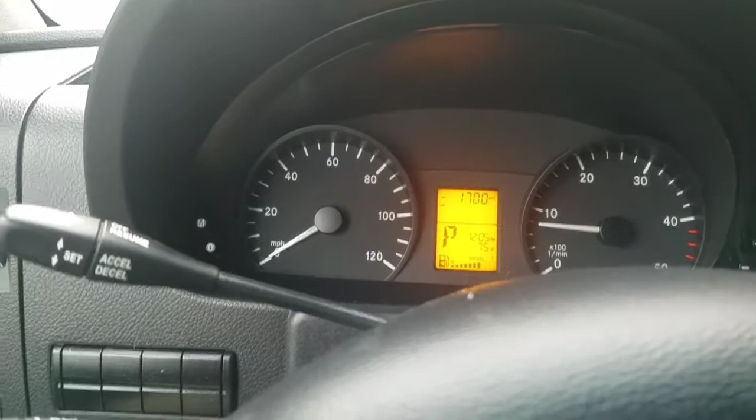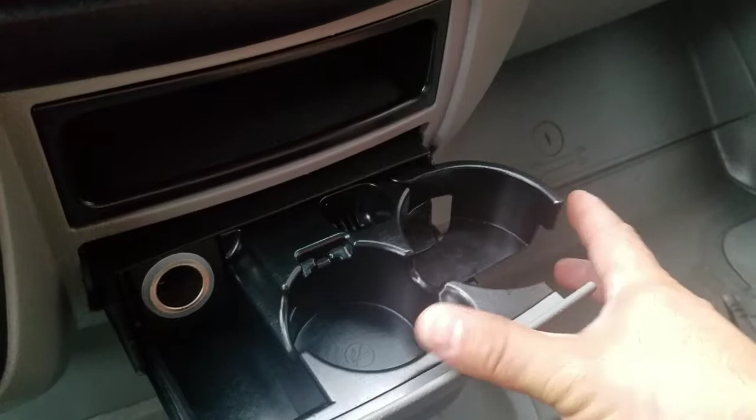Alright, there's a small cover missing for an extra button. It's just a cover, but it is missing. What else did we notice? There's a clip, the clipboard, supposed to hold papers. Put the clip here. That's broken. The cup holder is supposed to ratchet in and out to hold your cup. So if we decide to put our water here, it should tighten up and hold, but it doesn't. It'll just fall over. Alright, so I guess you could put it there.

Test the glove box. Glove box opens, closes, locks. Parking brake. Put in drive. Parking brake is holding. In reverse, holds.

Okay, we have another compartment here. Seems to be working. Dome light works. Both seat belts we tested, they're both functioning. They lock.

Interior looks pretty clean. Yeah, pretty normal wear and tear. It has 31,000 miles, very low miles. Alright, the interior does look pretty clean. Radio is functioning. Doesn't sound like any of the speakers are broken or damaged.

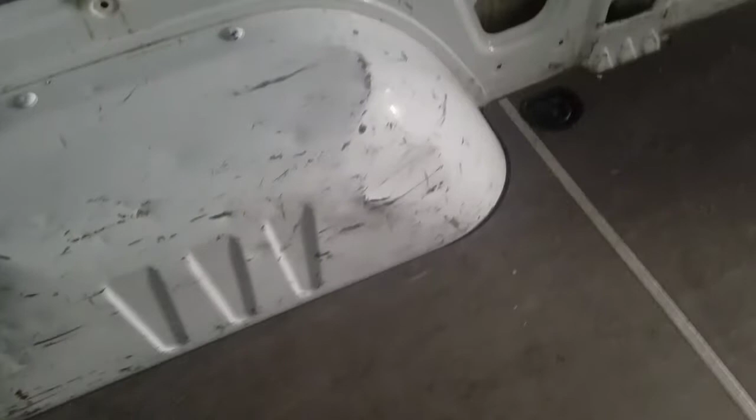We'll take a look in the back here. Floor looks pretty decent. The wheel wells are banged up a little bit on the left side. Some internal damage from it being used as a cargo van. Overall, it looks pretty good.

There's a few missing covers for the electrical system, but not a big deal. Everything else seems to be connected over here. Wiring's working fine there.

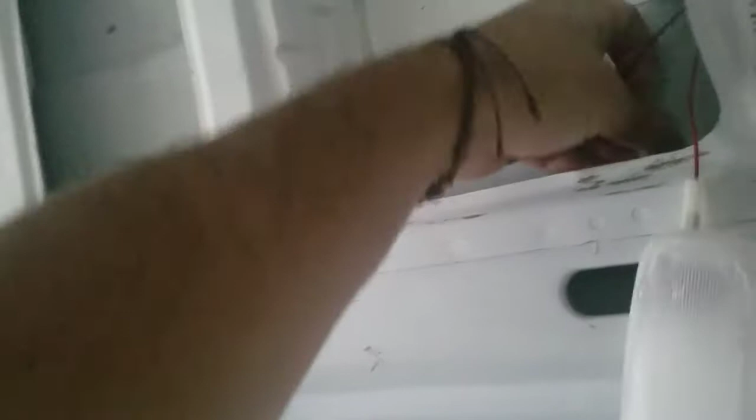Alright, I got a dome light that's— okay, so there's a little bit of an electrical problem here because I wiggle this and the light comes on and off. I guess the wire shorted somewhere. It came apart on the actual connection from the dome light itself. There's a little bit of damage on the panel, internal panel for the door. I'm not sure if any of the damage protrudes the body to the outside. I'd have to look from the outside when we get back out.

We're gonna go on a quick road test and see how everything feels. Okay, we tested the AC. It is blowing pretty cold. Fan speeds are working. Recirculate, it's working.

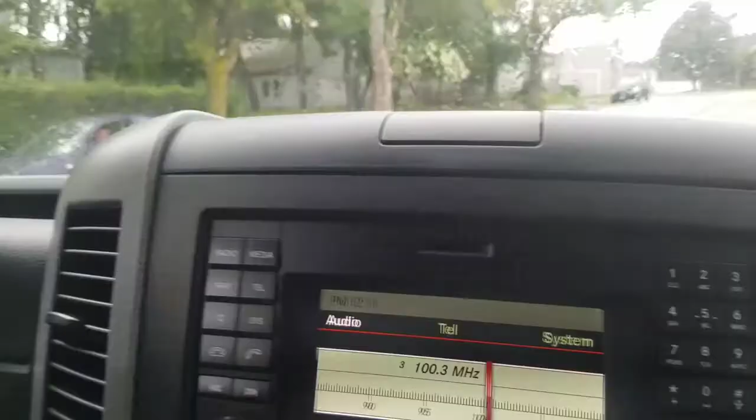Alright, so we're going on the road test. So far it feels pretty good. The wipers are wiping, no problem. There was a little bit of streaking in the beginning, but it seems okay now. The truck's a little bumpy, but it's probably because it's empty, and it has the 2500 suspension in it, so with an empty van you're going to feel a little bit more bouncy.

I hear the turbo coming on. It sounds like that's working fine. It has power. You hear a little bit of noise in the rear or in the back of the car, but it sounds like it might be normal. It's probably because the van's empty and it's echoing.

Alright, so we're taking it down the highway. It's raining pretty bad over here, but taking it down the highway. It has plenty of power. The vehicle accelerates when you ask it to. Engine feels very healthy. Tires seem to be grabbing the road pretty well. It's not slipping, even though it does have plenty of power to do so.

I'm going to take it on one quick ride just to get up to speed and make sure there's no vibrations, and then we'll head back to the shop and do the electrical inspection and the underbody inspection.

Okay, so we went over the bridge. We got it up to about 75. I didn't feel any vibrations. I think the truck only goes up to about 82 miles an hour, and then the governor will kick in. It won't let you go any faster anyways. So it feels solid. No lights came on the dash. Temperature control seems to be fine. And again, I didn't feel any vibrations.

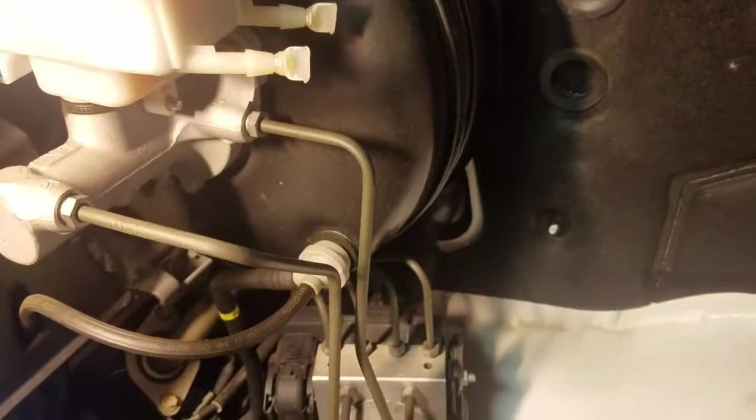So we have the hood open. It has a 4-cylinder in here. I do not see any signs of leaks. Washer tank is holding. Brake lines are okay.

There's no indication of a front end crash on the support, at least here. Looks like it's pretty solid.

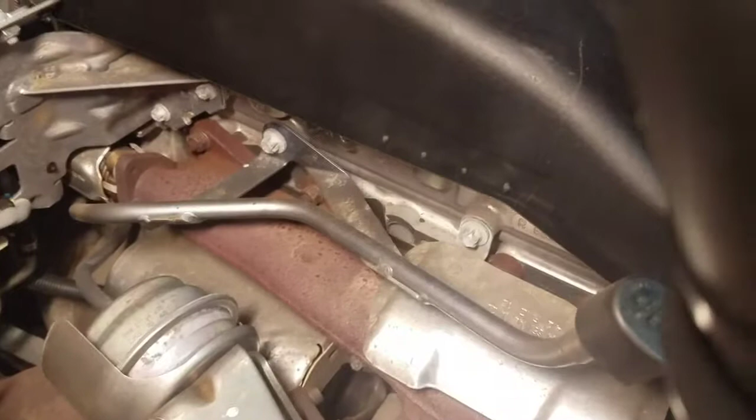Okay, this is the other side of the engine. The turbo looks okay. Everything looks very clean, which I would expect for a 30,000 mile car. Looks original, looks OEM. Diesel exhaust fluid.

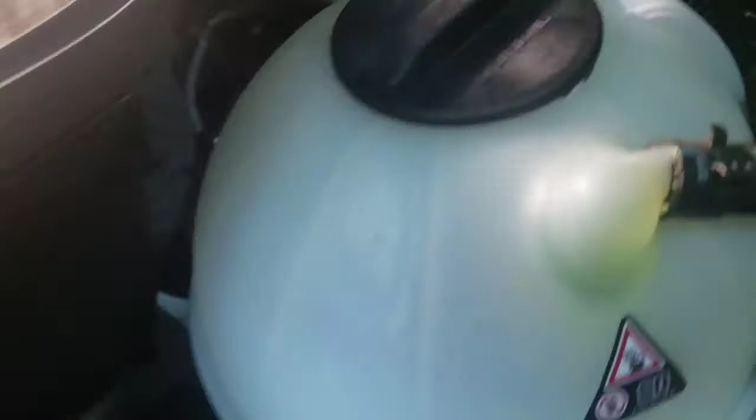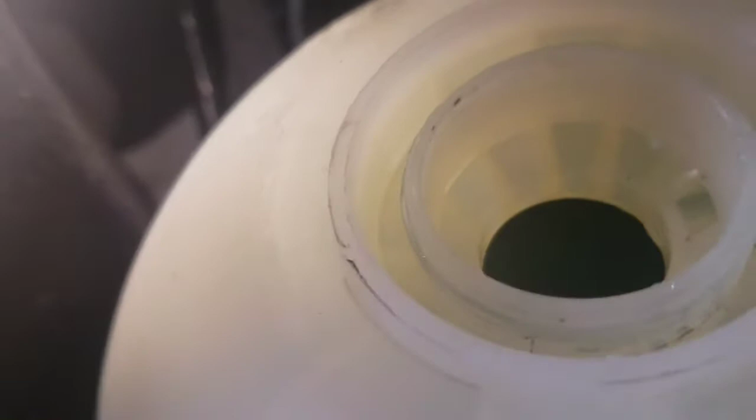The coolant kind of looks green, which usually means it's been replaced. Actually, no, when I look into it, it looks more blue, which is the OEM fluid, so that looks okay.

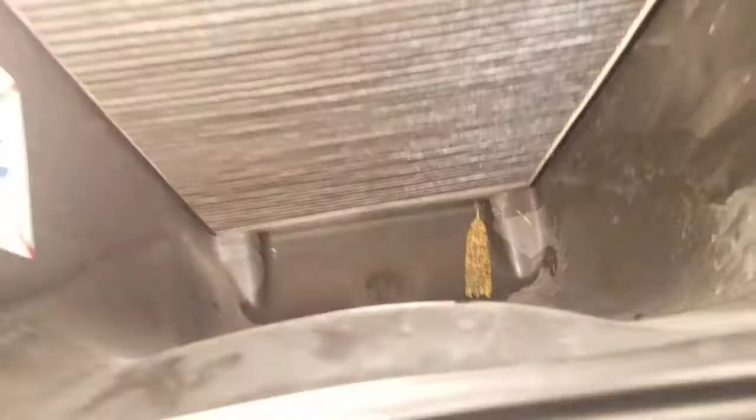I do notice that the reed valve, which is just a drain valve in the air filter housing, is clogged at the bottom. So what we'll do is try to clear the hole.

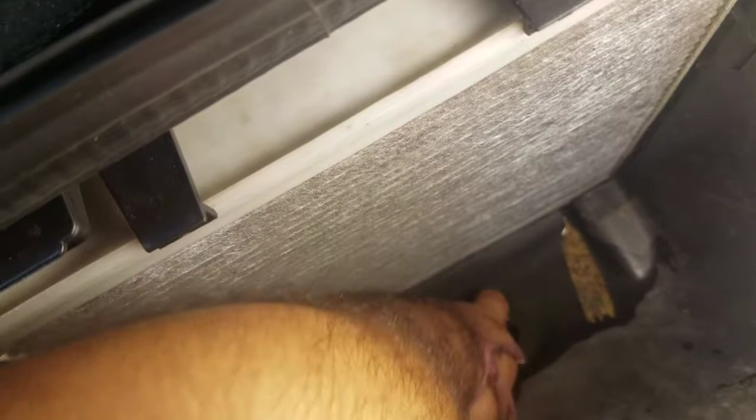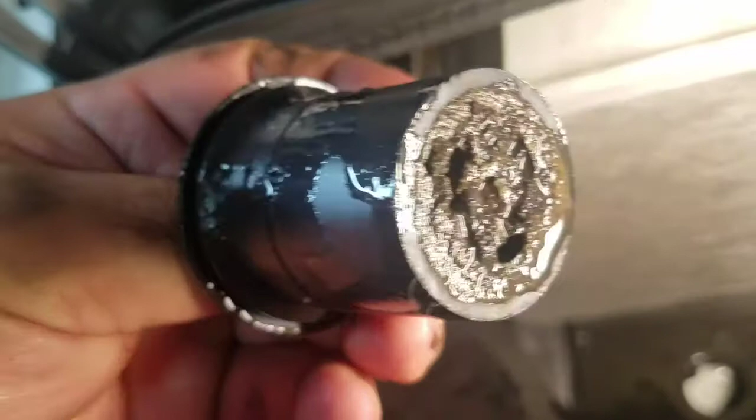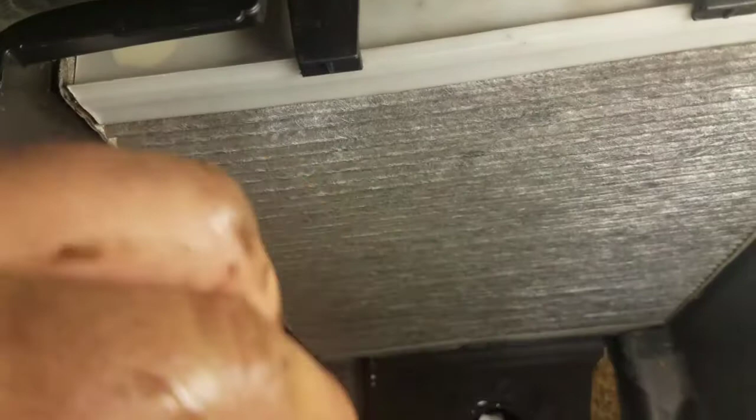It's better to just remove this completely. Alright, so I removed this valve. This valve gets clogged, cleared it out. We'll clean it really fast to prevent water from going in here later, because rainwater can come in, go through this filter. I don't know if it's happened already, and then it can go into the glove box area and into the car.

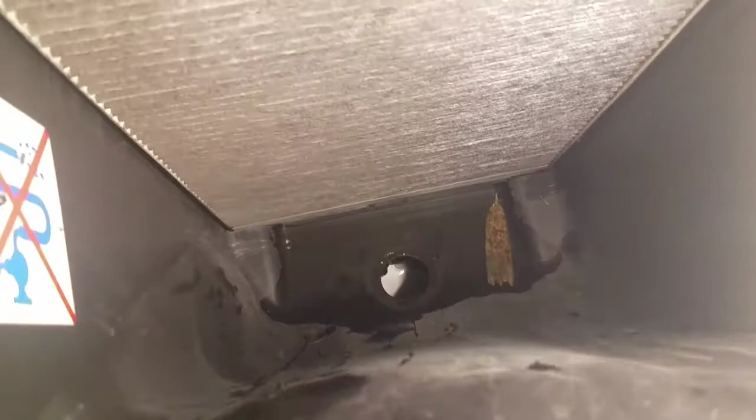So here, Jose, just grab this. We're going to clean that out in the sink. That's just a preventative measure, whether you buy the car or not, at least the next person won't have that problem.

Okay, the lights are all working. I do notice that there's some tape around the corner here of the light. I can't really make out whether it's cracked or not, but it does look like there might be a crack.

It's very hard to tell because they have the tape over it. Yeah, I can't really tell. The tape is definitely cracking, I think it might be covering something. I don't see why else they'd have tape over it, unless it was cracking or there was a crack to the lens. It's hard to tell without peeling that off, but the headlight may be cracked on that side.

Grille looks good, looks brand new. There's again some tape on this side. You might want to have them peel that off before you buy it and take some pictures to prove that it's not cracked on both sides. It might just be some tape someone put over there to protect it, but it's hard to tell whether it's cracked or not. The body looks like it's in really good shape.

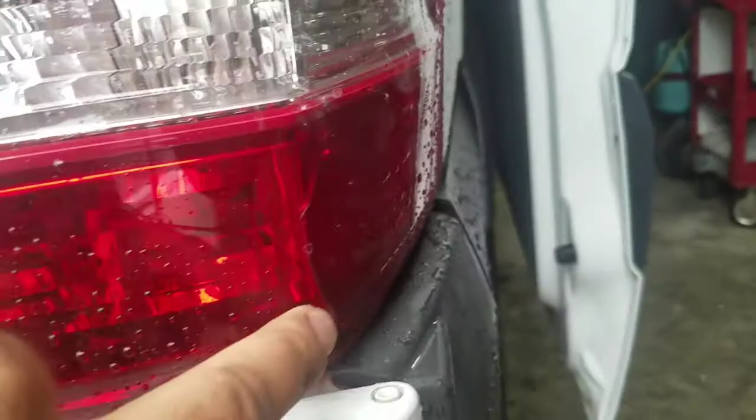Taillight has a crack right here, a small crack. Water's probably going to start entering. There's another crack down here, and one more - oh, that one's actually not going through, but you do have one at the bottom and one on the side. Water gets in here and it'll start corroding. It happened to our van.

This side, just a little scuff, but nothing cracked. On this side, doesn't feel like it - no, this side looks pretty good. Your marker lenses are okay, marker lens okay over here. It's hard to tell, but the third brake light looks alright as well.

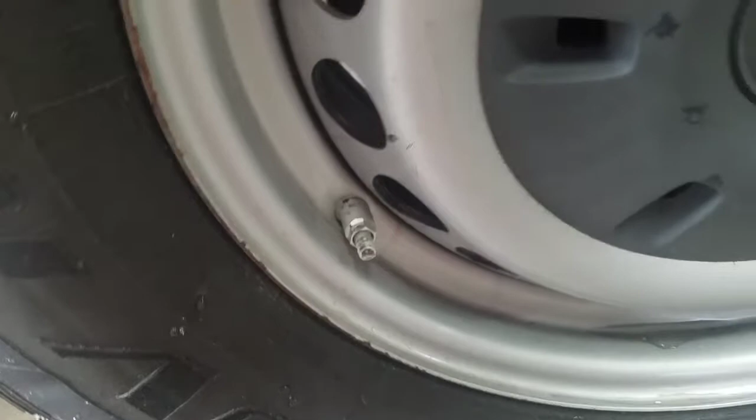Tires have ample tread. This is the left rear tire. Right rear tire is just the same. Right front tire, plenty of meat. Left rear tire, right rear tire the same. It has valve stems, metal, which probably means it has a tire pressure monitor system in it.

The sliding door opens very smooth, like glass. It's floating. We have some problems with our door on our van, so I noticed that that's in great shape there.

Doesn't really look like too many things were spilled on the interior, a couple of stains expected. We're running the diagnostic test now, which is why the wire is connected to it. And see, the door's opening - door opens, no problem. Interior looks pretty good. Everything looks good under there.

Let's see if it has the toolkit. Can you grab a flat screwdriver? We'll open up the toolkit. Window switches work, windows are going up and down. Alright, so the toolkit's in it - yeah, toolkit's in there, lug wrench, bottle jack, all your parts are there.

Overall, as I said before, the van's in really good shape. A couple of things like the tail lights, headlights are questionable. I'm going to check the brakes and the undercarriage while one of the other guys is connecting the computer and checking to see what kind of codes we have.

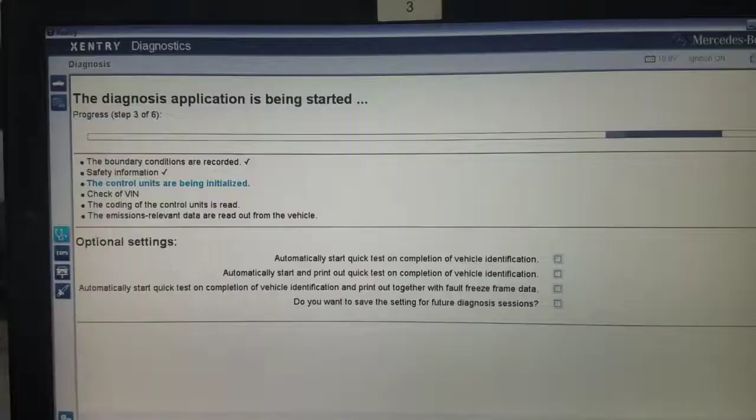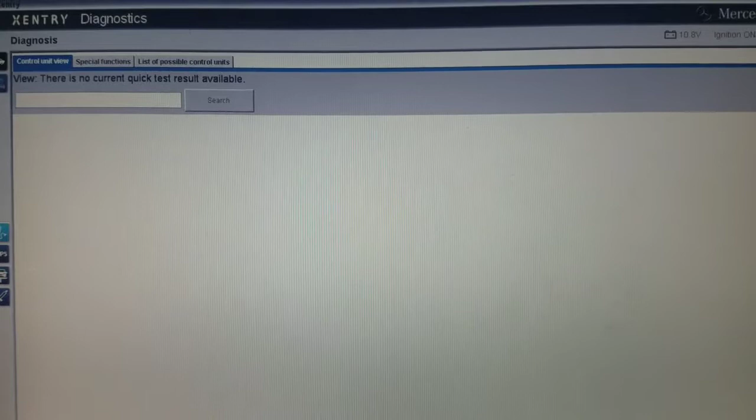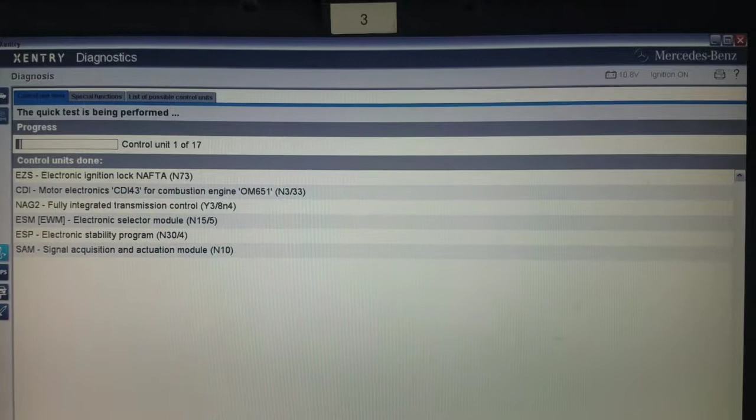Okay, now we're running the computer diagnostic portion of the test and the inspection, and the computer is going to do its thing. It's going to connect to all the control modules in the car and tell us if there's any old codes, new codes, current codes, and once we have all that data, we'll show you all the information. So we're going to do a quick test and run the tests: ignition lock system, engine module, transmission module - still running the test.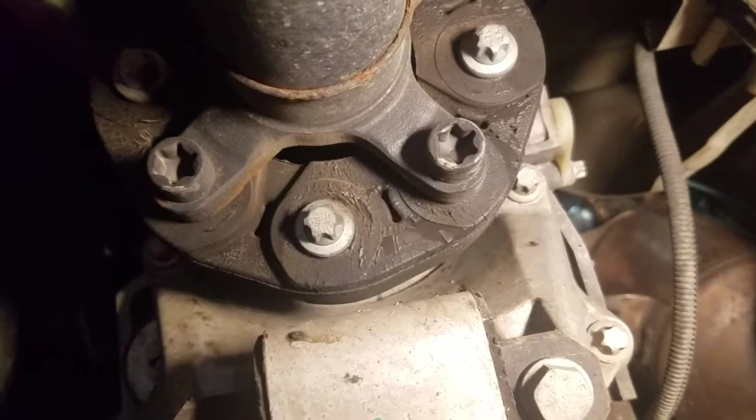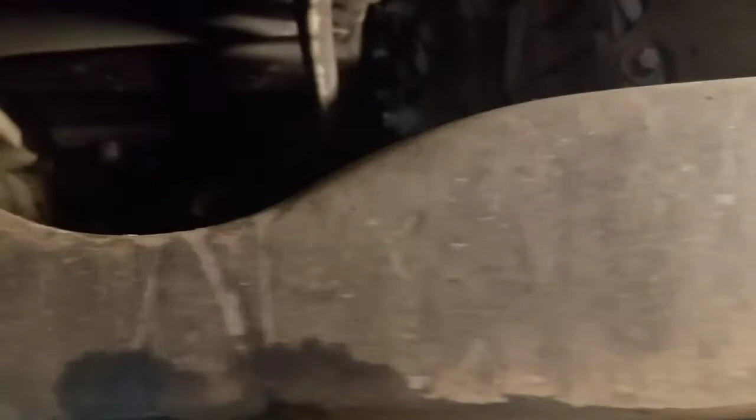I also looked at the front of the engine area, underpan, the underpanel for the oil pan. Everything is dry, I do not see any leaks or any signs of oil. Transmission looks good, again no leaks. Mount feels solid - well, not solid, it feels like it has the right necessary play. I thought there was a little bit of a fuel leak, smelled a little fuel when I slid under, but I think that's just some overspill going down the filler neck and dripping out the side. So it's a false alarm.

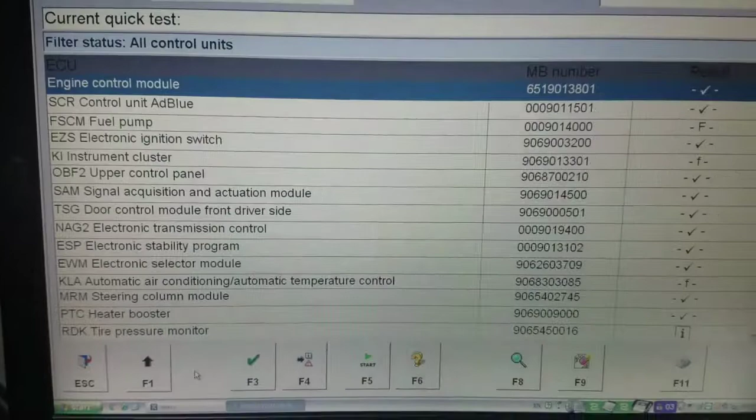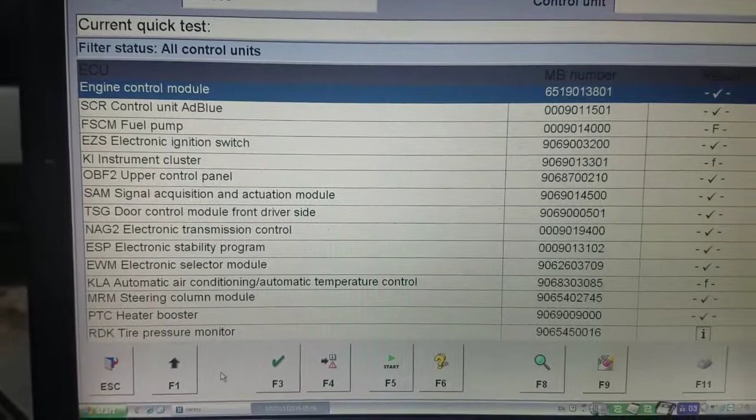Okay, for some strange reason I had an odd fault - it said unknown fault type in the engine control module. And whenever I click on the engine control module to enter it, it gives us a glitch and tells us there's an error, it cannot communicate. No matter what I do, it tells me to check these things. So it is possible it could be an engine control unit, a power supply, or engine CAN bus problem - CAN bus is usually the network communication data lines.

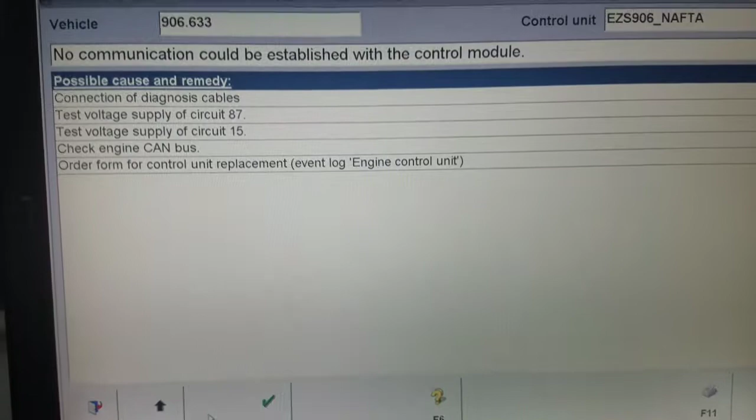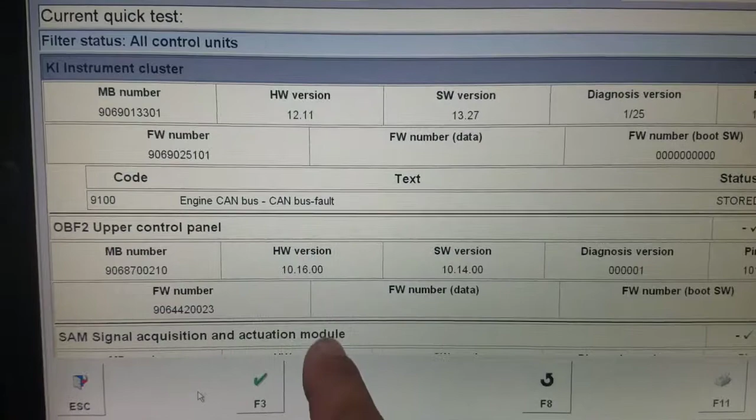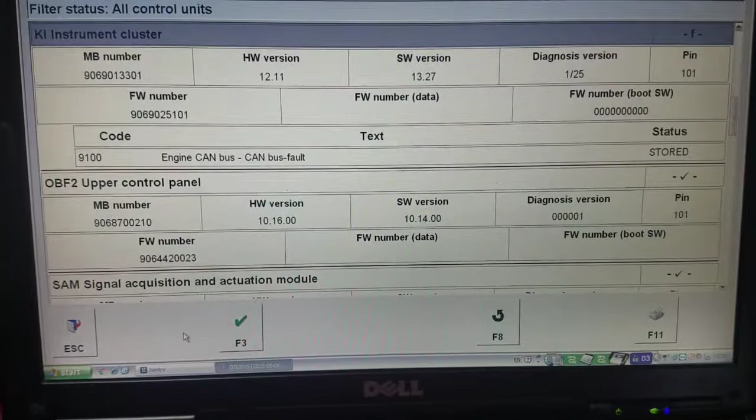That's possible because we did see another code in the instrument cluster - if we go here, it says the engine CAN bus has a CAN bus fault. So it's possible there could be a CAN problem with the car. It is driving fine, there isn't a check engine light, there isn't any issues with that. There may be nothing, but I have to at least disclose that I'm having an issue getting into the module. It could also be a glitch in our software, but unfortunately there's no other way to check that.

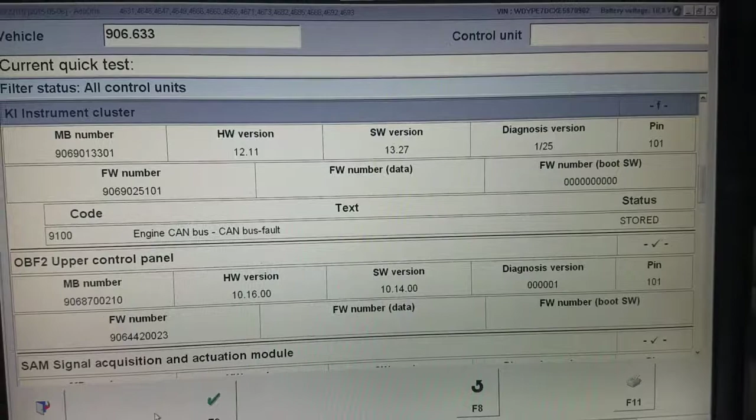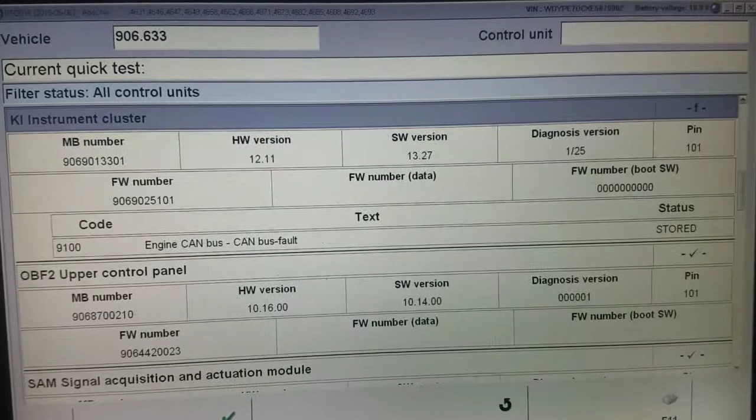If you decide to purchase it, I would definitely put a clause in there telling them that you might have to go to the dealer to have them check just to see if the engine module is okay with another software version, something newer. If it doesn't come up as a problem, then you're good.

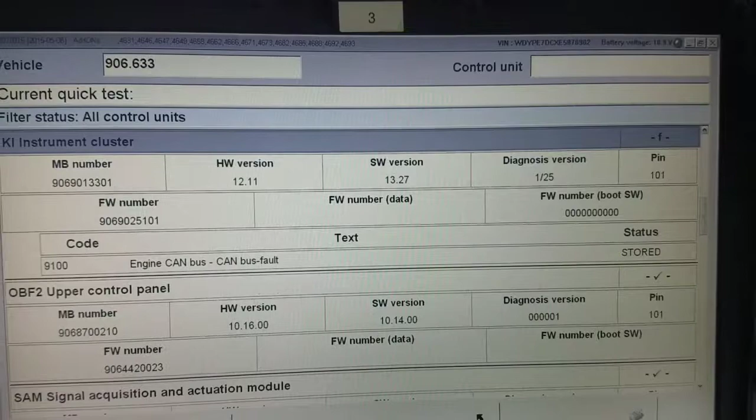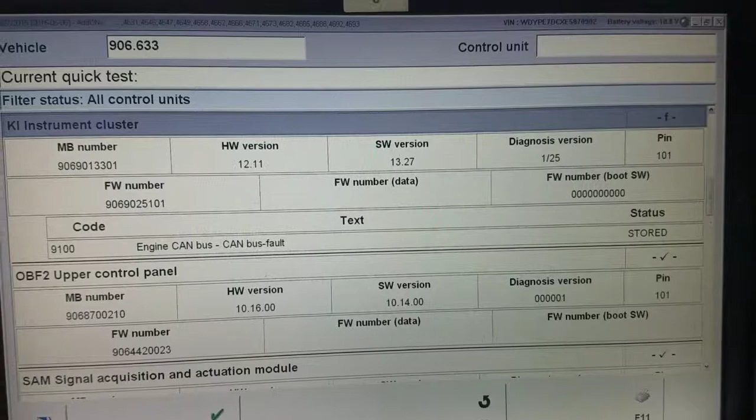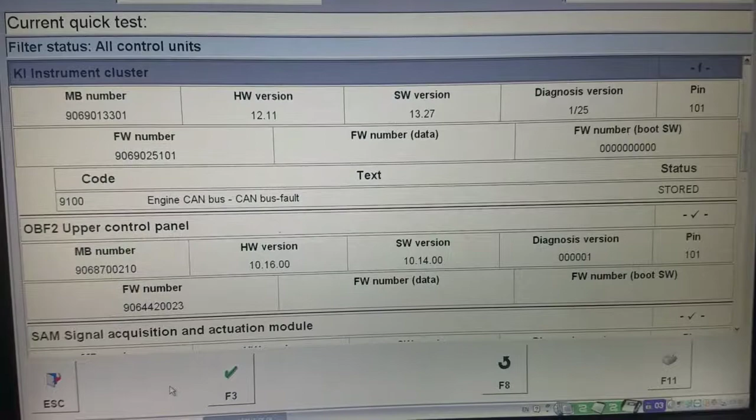If it does come up as a problem, then it'd have to be fixed. But it's odd because the unknown fault type is a general code, and it will let me erase the code because it was stored, but for some reason I cannot get in. I was able to get in under the wrong engine, but it tells me there's a problem. In other words, I'm in the wrong control module. It should be automatically picking this information up and getting right into it. So it's noteworthy prior to purchase at minimum.

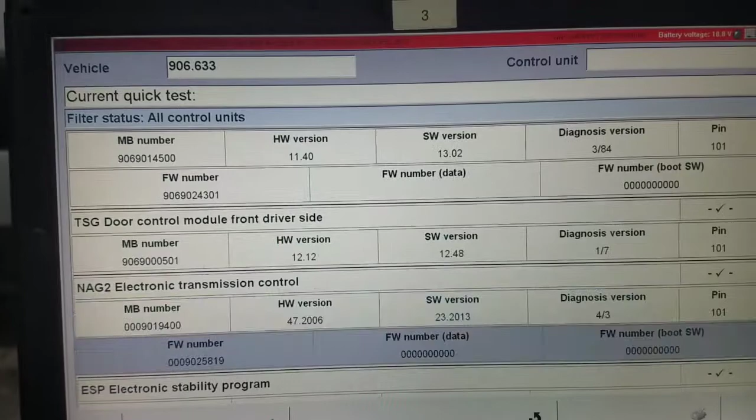So this concludes the electrical inspection of the vehicle. We did mention that there was a fuel code. Fuel pressure circuit is low.

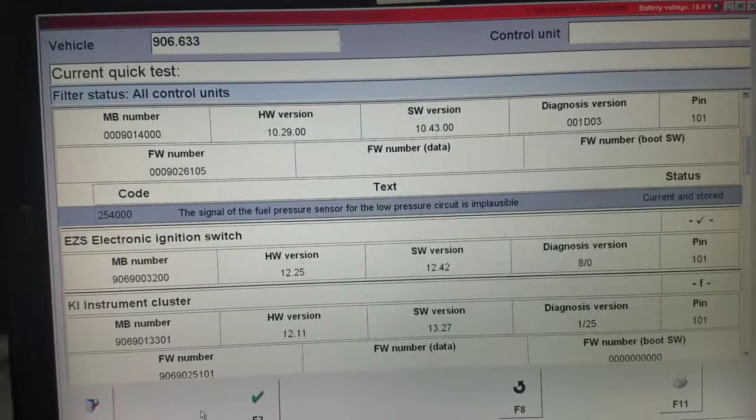As I go into that code, it tells me... current fault code. So it is current. It is just recognizing that there's a problem right now.

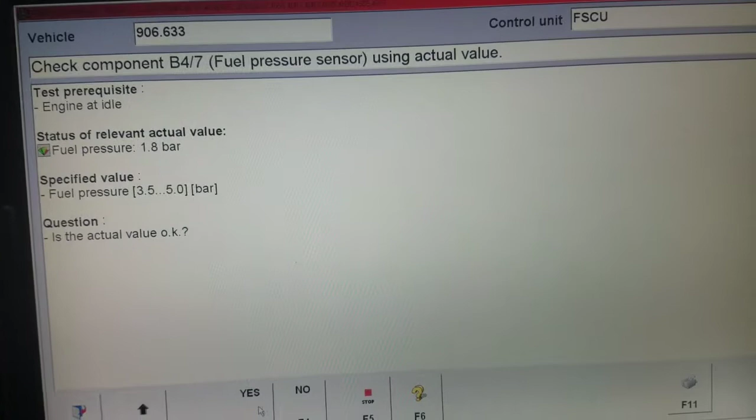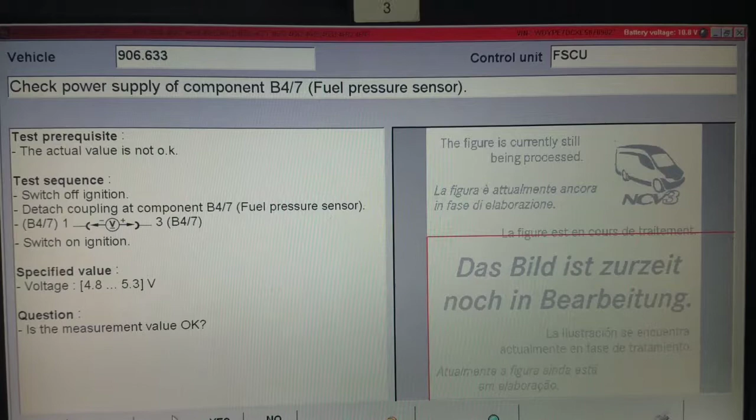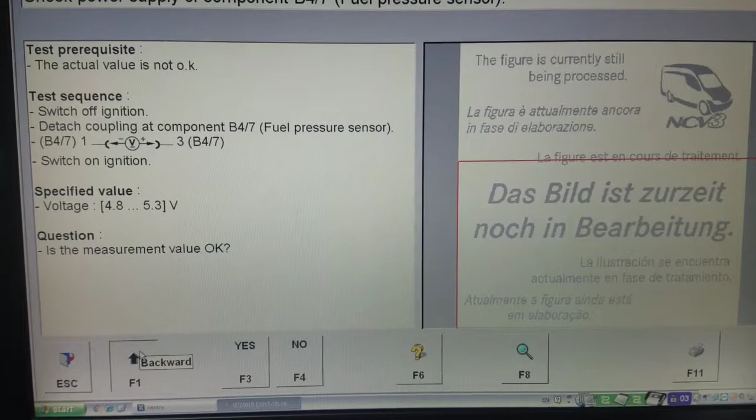It may be a problem with the fuel pressure control module. But there are a few other tests that need to be completed to diagnose, go through the tree, and figure out if they're problems or not. It may be a problem with the wiring as well. So these are the two noteworthy things I noticed electrically going on with the vehicle.

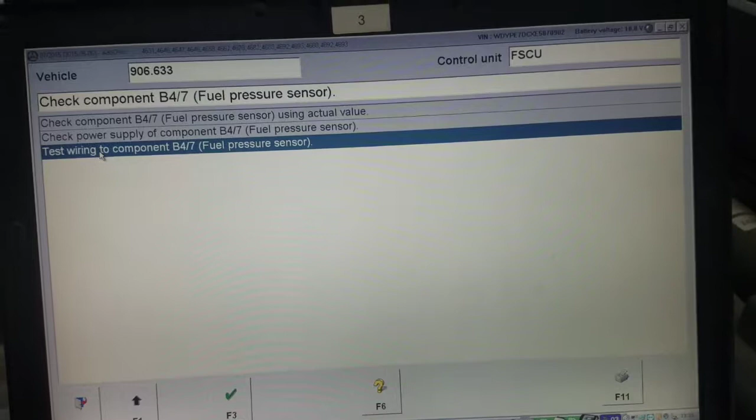The car doesn't look like it was in any accidents. It doesn't look like any foul play. It could just be a computer glitch. We can discuss it further over the phone. That completes this inspection, and we're going to gather this video together and send it over to the client.

Alright guys, so we're finishing up on this 2014 Sprinter 2500 van. The customer came to us because they wanted a pre-purchase inspection. They're buying this vehicle, they're out of town, and they hired us to check it out. So we are doing a 2-hour inspection. This is the conclusion of it.

The computer diagnostic test is running behind me. We've already done the road test. We've already done a visual inspection of the underbody, the physical body. We've looked at the tires, the brakes, everything that's possibly something that we would check before you buy a car.

Overall, my assessment of the vehicle is it is in very good shape. It only has about 32,000 miles, so I would expect that. It's a 4-cylinder, clean, no oil leaks. The suspension feels tight, tires are brand new, brakes look pretty good. The doors open smoothly. There's a couple of minor dings and dents from the inside protruding out, but I'd say that's good. It's got the newer style radio. Overall the van looks like it's in really good shape.

If I were purchasing this van and this was what I needed, I would probably go ahead and go forward with it as long as the price was right.